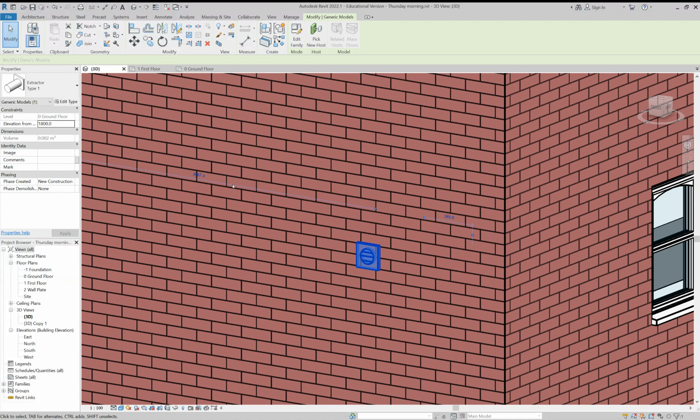In this recording, we're going to have a look at creating an extraction fan that can be placed as a wall-based object. Here is one I've done earlier, and just looking at that in 3D view by there as well. So we can see how it goes through the wall and terminates on both sides. So I'll create another one now at a slightly different size just to show you how to do it.

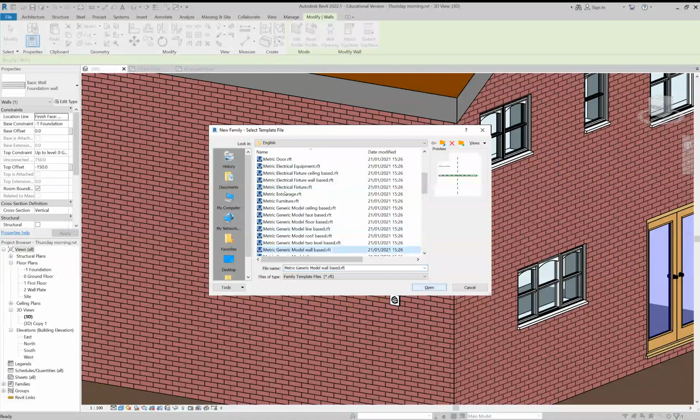So first thing we're going to do is go File, New Family, and find the wall-based object. Too far. Model wall-based, there it is, and click Open. So that then opens up the different views.

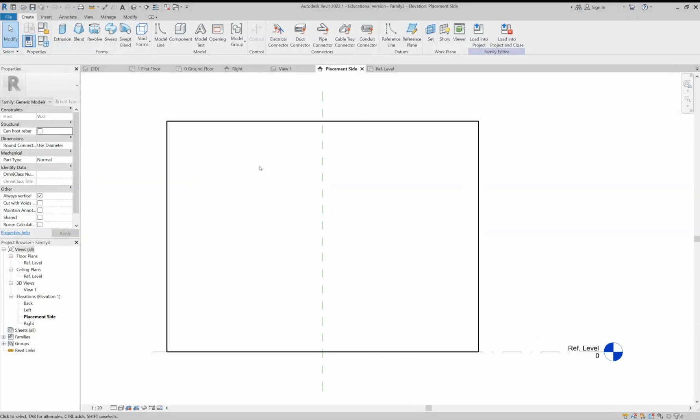Now this is going to involve 3 different elements, and we're going to do them as different extrusions, and we're going to make sure we do them all from the same view. Okay, so I'm looking directly at the wall, extrusion to a square, and this one I'm going to do a 150mm diameter duct going through the wall. So therefore I'm going to do this 225 insides.

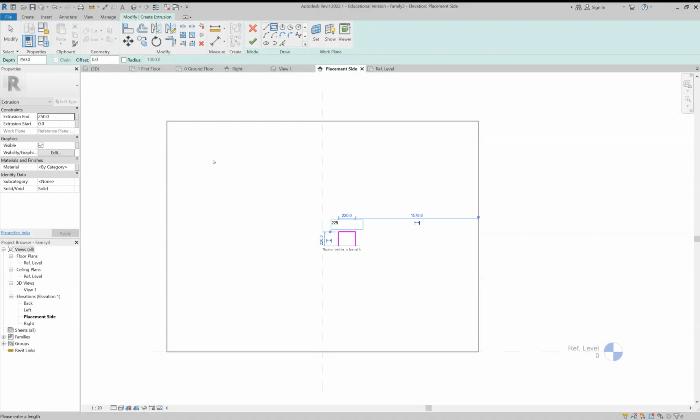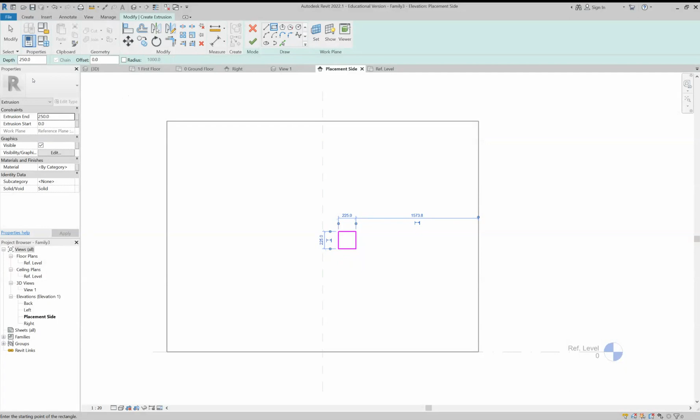Okay, now if you know the thickness of your wall, that's a good starting point. If not, you can always edit it later on. Now my wall is about 350mm thick, so therefore what I'm going to do is half that to 175, and I'll go from there. So I'll have the extrusion start at 175, and I'll allow it to be about 25mm thick on the outside.

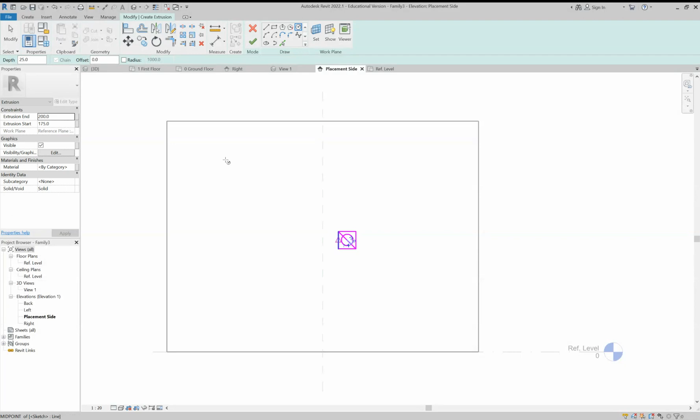Okay, and then I just want to be able to center my circle for the duct and make that 75. There we go. Delete that and tick. So there's the first element. All right, now we'll notice that it's disappeared. So what I'm going to do is jump round to the back and zoom in by here, and we can now see it by there. So I'll now work off this side here.

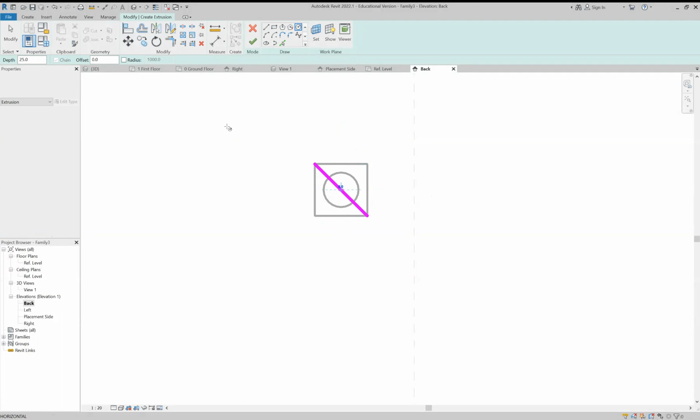Let's create another extrusion. And again, let's just quickly draw a line by there. So this is going to be the duct going through the wall now. Okay, so that extrusion is going to end at 175. So I'll change that to 175 and start at 0. Okay, delete that and tick. And then finally, I want to show some sort of grill across the front of it.

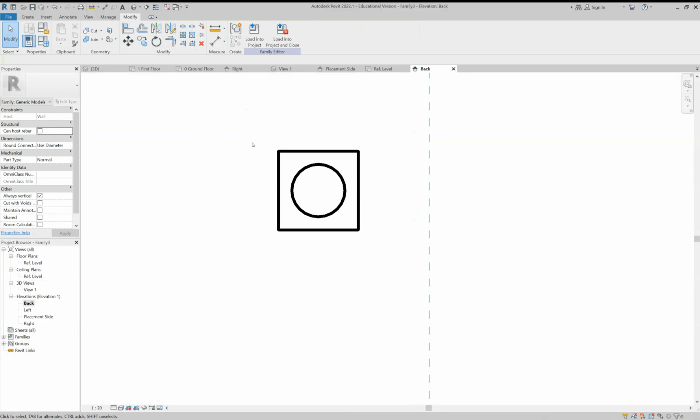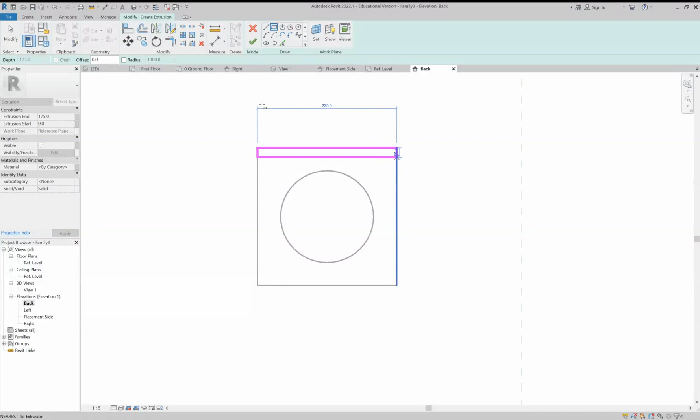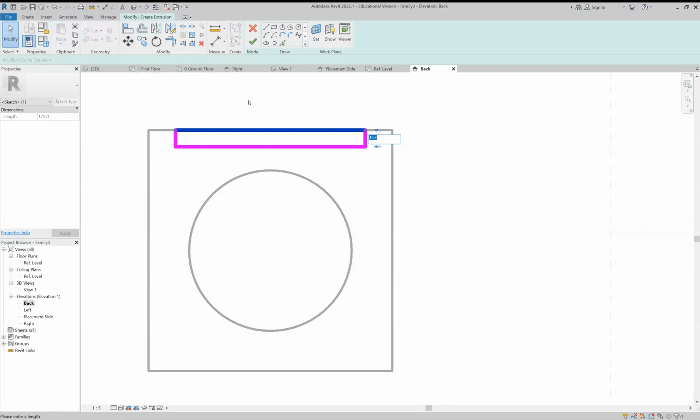So what I will do here is again another extrusion, and I'll just do this as, let's change the scale as well to 1:5, so it just makes the lines a bit easier to see. Right, I want to keep it square, so 225. Right, I don't want it to be that size. So what I'll do now is click on this, change that down to 200 on that side, and change that then another 25 down there, so 175, and then I'll change that. It only needs to be a few millimeters in size.

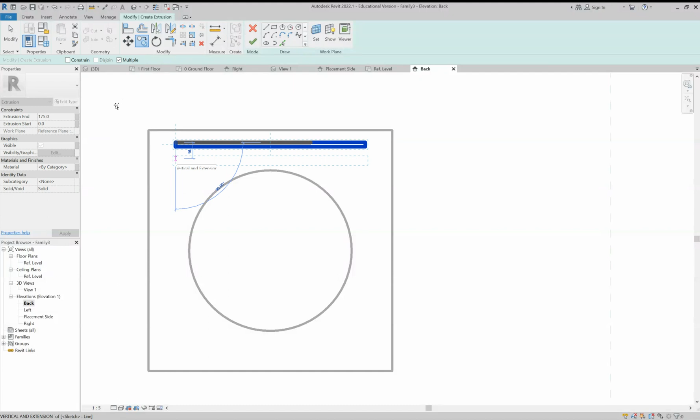And then I'm going to array that. So copy. It won't let me array there, so what I'll do, I'll just copy it. And come down 20. And then come down another 20. Oops. Okay, and I'll just repeat, there we go, that coming down there. So copy.

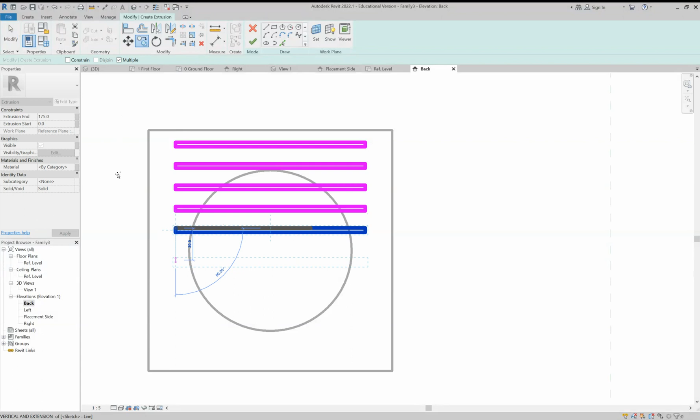So you'll see I'm just pointing in the right direction, typing in on the keyboard 20, and then just hitting the Enter key. Just making sure the cursor is pointing in the right direction each time. And there we go.

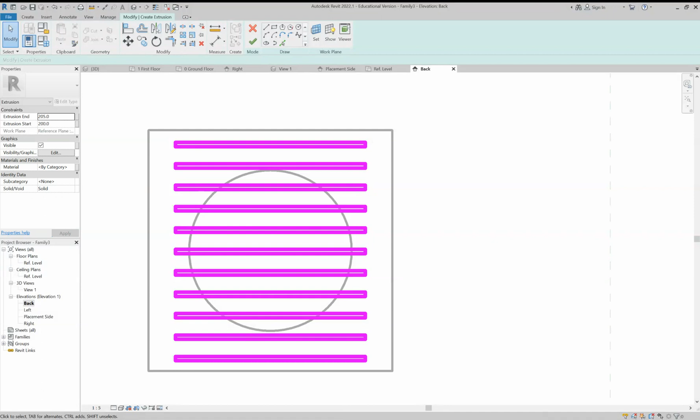Now the extrusion on this one, we want it to start at 200 and end just past that, say 205. There we go, and we'll tick that. Let's have a quick look at that by here, and we can see now we have a termination for an extraction.

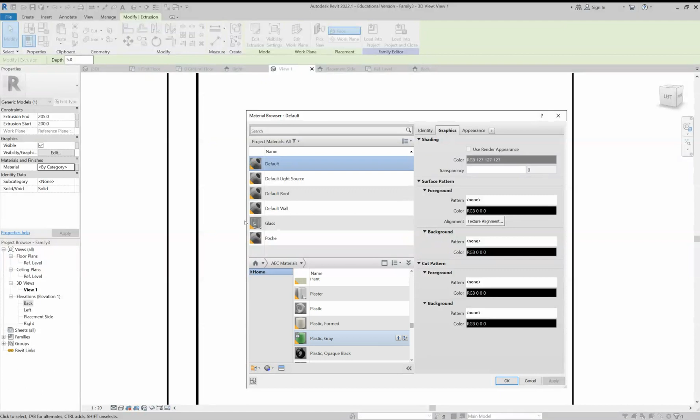Now what we haven't done here is looked at the materials. So we're going to click the material for each of these categories, and there's no real selection there at the moment. We'll click home, go into the list of materials, and find the plastic - you could use a material other than plastic, and you can also change the colours if you wish. I'm going to find the white plastic, there it is, opaque white, click on it, and load it into there.

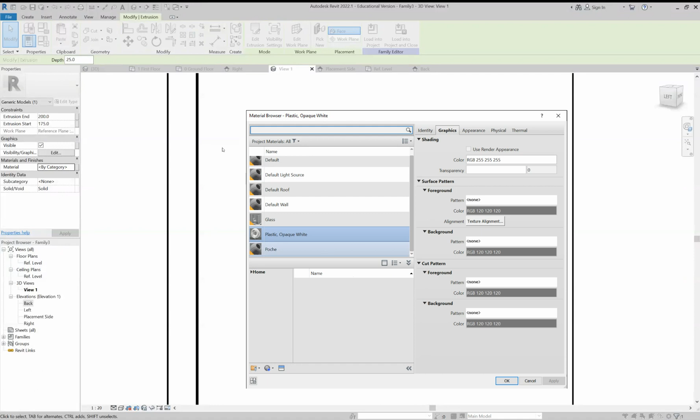Now, as you do this, you may notice that while the appearance is fine for a realistic view, if you're doing a consistent colours view, the colour is grey, and I don't really like that, so I'm just going to change that to white, then say OK. Then I'm just going to select these other objects as well and change those to white at the same time.

The plastic. Right, so now we've done that.

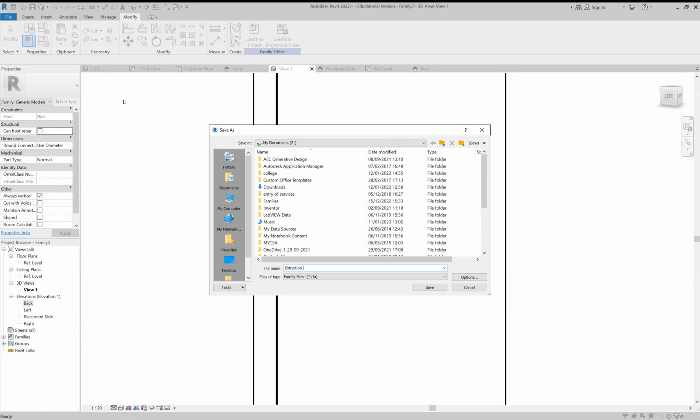Now I'm going to go File and Save as a family and give it a name, and this is going to be extraction fan 150 diameter. Now you could name it differently, you could have done 225 square for the actual size of the vent. Once you've done that, load it into your project.

And you can now see that you are fixing it to a wall. It also has the elevation from the floor, so I'll change that from 1339 to 1800, and I'll just drop it in by there. Now, if that's not in the place where you want it, of course you can click on it and adjust exactly where you want it.

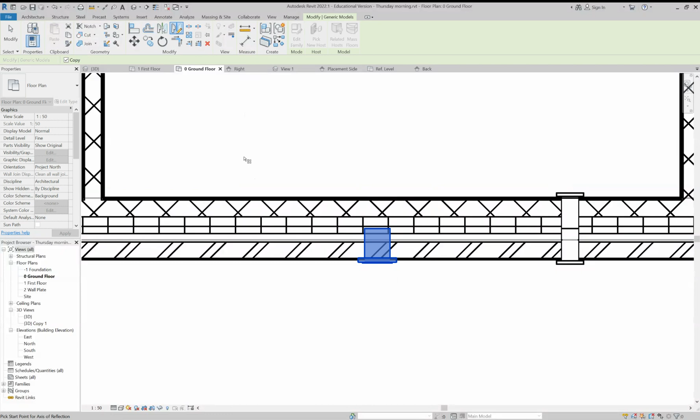But I also want an extra one, so I will click on that, use the mirror command, and just mirror it by there. Now we have the extraction fan in plan view. If we look at it on elevation, we can see by there as well, we have our extraction fan going through.

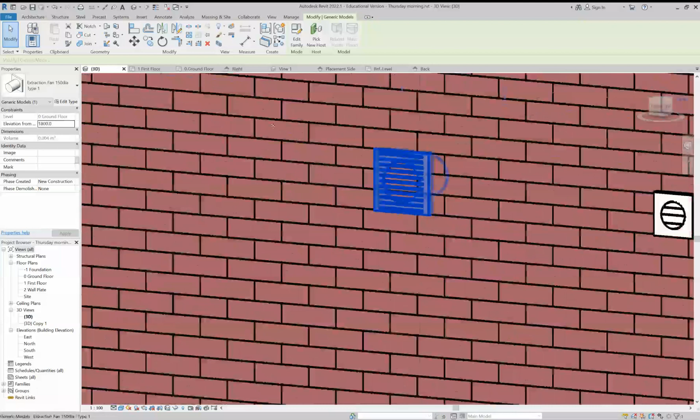We may notice on this one that the actual brickwork is still in there as well, which is a bit of a nuisance. Let's have a little look at our 3D interior view. And there we go, that's on there.

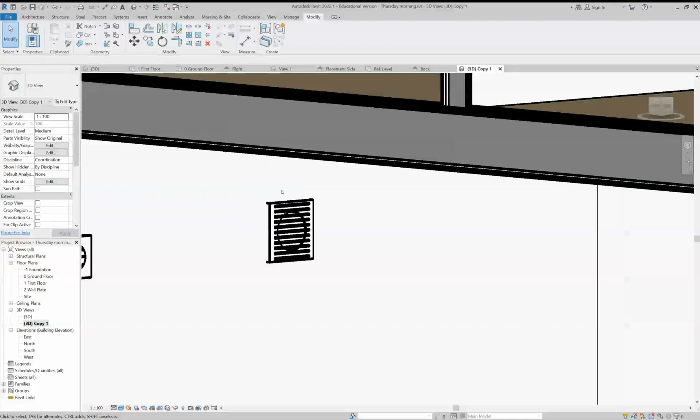Now let's just say that you don't want to be able to see that brickwork, which really we don't. You'll notice in the other fan I just used solid slats covering the hole, which obviously hides it. This one though, I haven't done that, so what I'm going to do is actually go back into it and edit it.

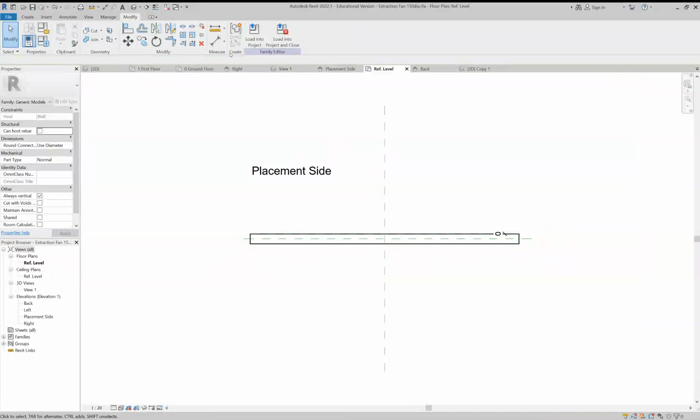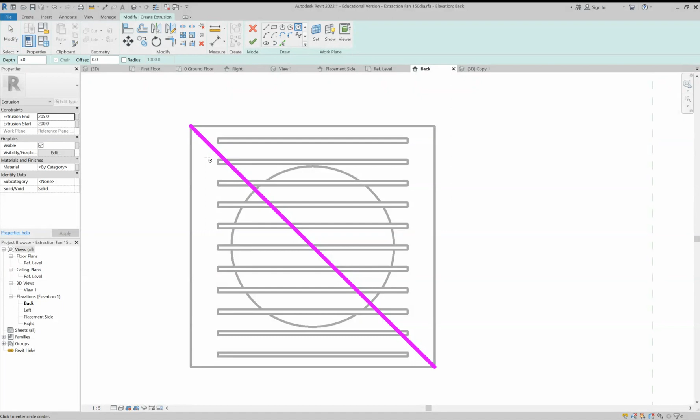So edit family, find this, and I'm just going to put another layer in there so that we can just get that filled, and it won't look right otherwise. So just trying to remember, do a circle. There we go, from there to there.

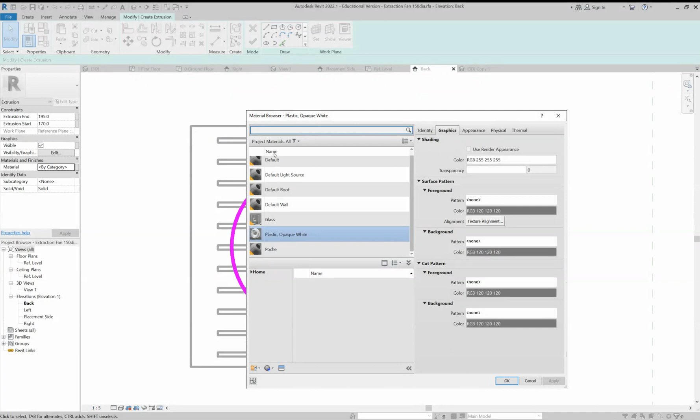And let's do the extrusion. I think let's end it at 195 and start it at 170, and hopefully that should hide it. There we go, now it's hidden.

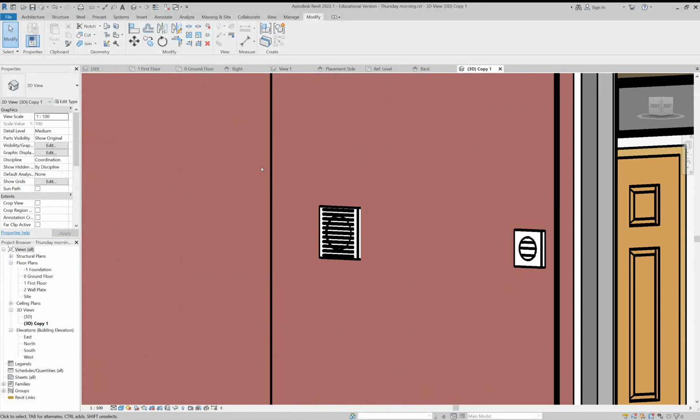I could have done that by editing the actual original tubular extrusion as well and just bringing it forward a little bit, since it was just recessed into the wall. Now that does look better because you can now see that it's white inside there. So that is our extraction fan.